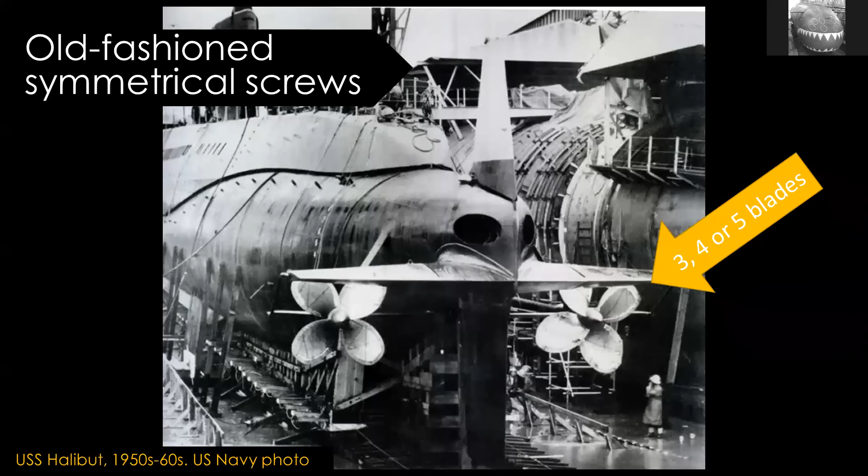What's not under there is a traditional propeller like you might draw it. This is called a symmetrical screw. The blades are essentially the same front and back, and it was absolutely standard on ships and submarines up until about the Cold War. This is an early Cold War US Navy one, and it's got two 4-blade screws. They're 3, 4, 5 blades, all pretty normal.

However, during the Cold War, it's realized that the propellers were one of the main sources of noise, and therefore the main way to detect and identify submarines. So a lot of effort was put into making the propellers quieter, especially in the West.

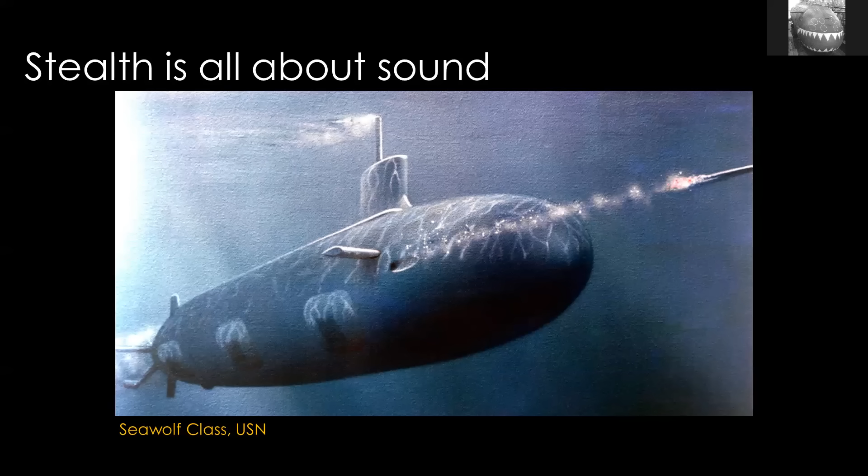This first of all resulted in much larger propellers, and the main reason for that was to allow them to turn more slowly. One of the causes of the noise was that when a propeller turns very fast, you get cavitation. You get small bubbles forming, and those bubbles collapse, and they create very distinct noise, which can be heard a long, long way away. So they made propellers very large.

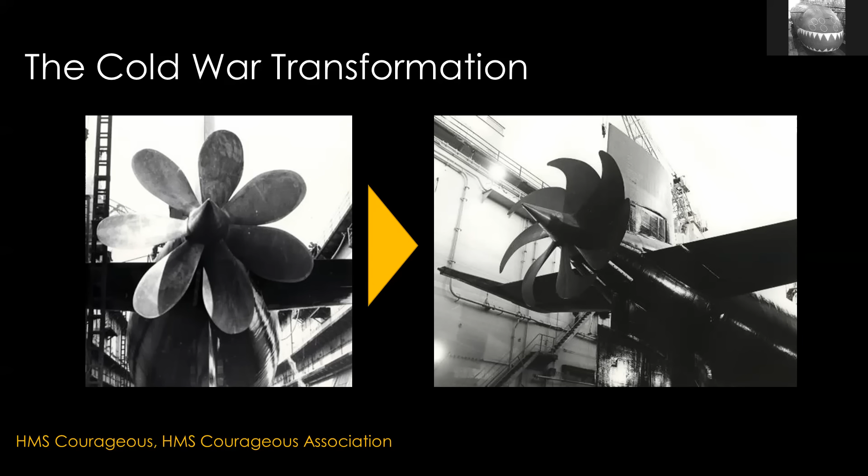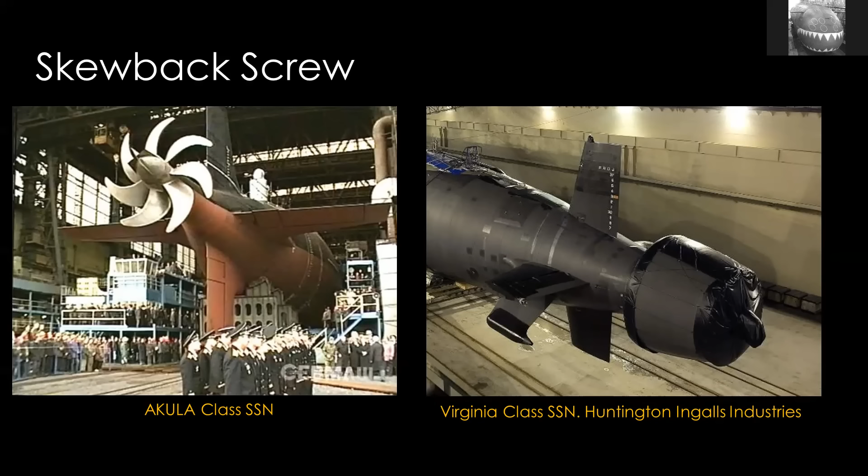So today we have two types that are predominant. The first one on the left is what we call a skewback propeller. That's a Russian Akula-class nuclear-powered submarine. On the right, we have a pump jet, also known as propulsor or even pump jet propulsor. And that is a US Navy submarine, Virginia-class.

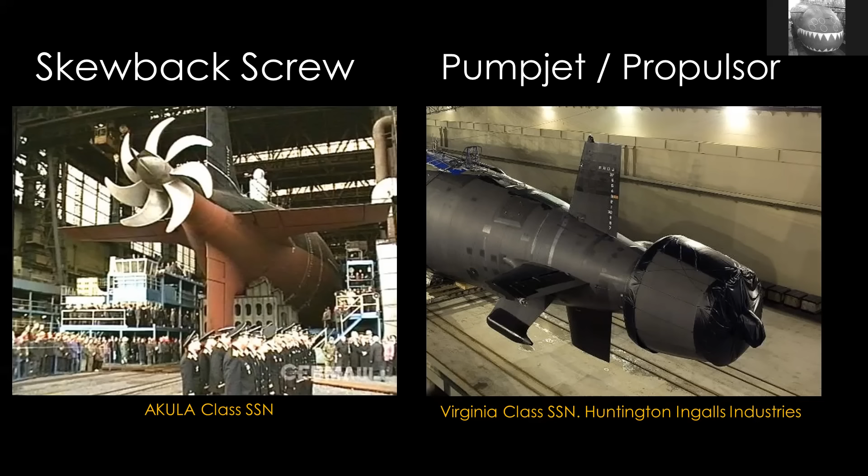Pump jets are stealthier, but they're also less efficient. So they're generally found on large, powerful submarines, nuclear-powered submarines, such as the Virginia-class here. Also, people still cover submarine propellers of both types, but you can see that even though they're not hiding that the Virginia-class has a pump jet, they don't want you to see inside. It's still very super sensitive. So, yeah, we'll look inside later anyway.

But first, let's talk about skewback screws. They turn very slowly to reduce cavitation. They also have a very large diameter, which is part of turning slowly. They mostly have 5 or 7 blades, and they are prime numbers, so they won't have harmonics. They have to be very precisely engineered. Any imperfections could create noise. And there's a lot of care taken to how they connect the propellers to the machinery that's driving it. That's invisible to the observer, but also important.

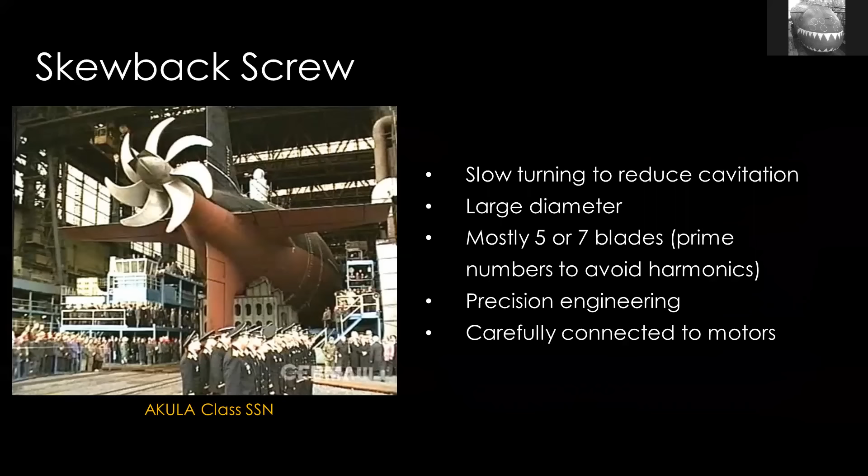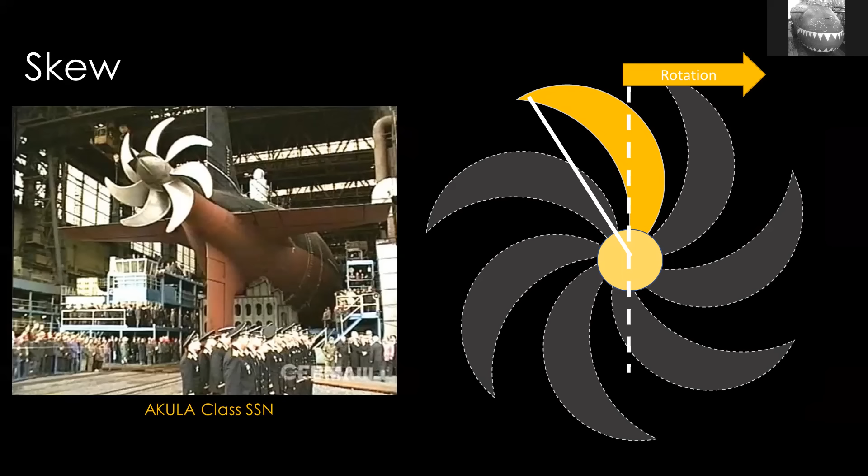So the blades rotate away from the tips, so the tips are trailing, if you like. And the angle by which they're trailing is known as the skew. They're also sloping backwards slightly, which is the back part of it, so skewback. How much varies greatly from submarines, but generally speaking, the sickle-bladed sort of screws that you see, they're called skewback.

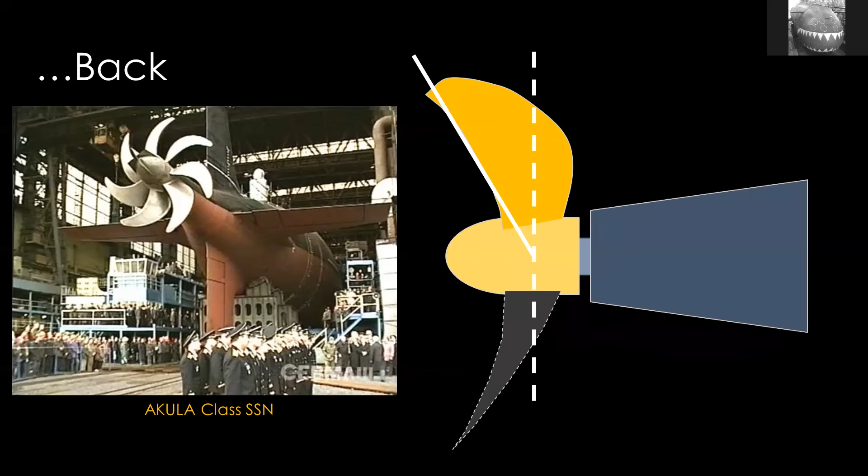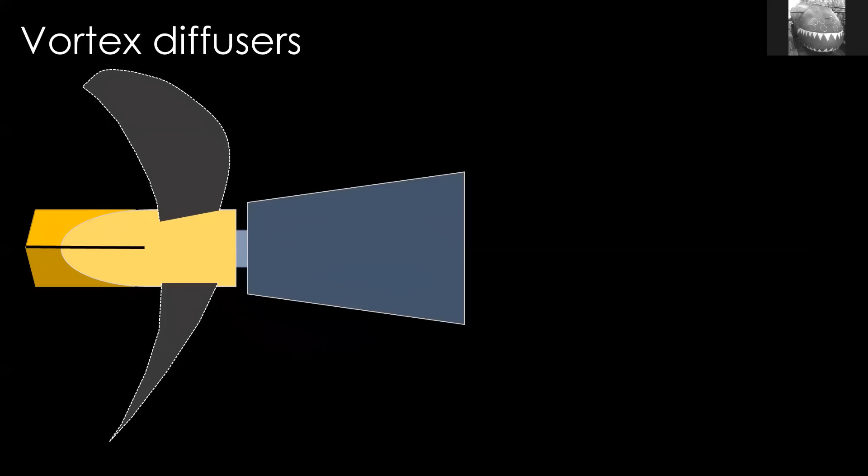The feature you'll see, which you might have noticed on the picture of the Akula, is that the back of the propeller boss has an additional structure on it. This is a vortex diffuser. On the Russian submarine we just saw, it's basically a simple cruciform shape - 4 blades fixed to the back that rotate with the hub of the screw, diffusing the vortexes created at the base of the propeller. Again, another source of noise and inefficiency, drag.

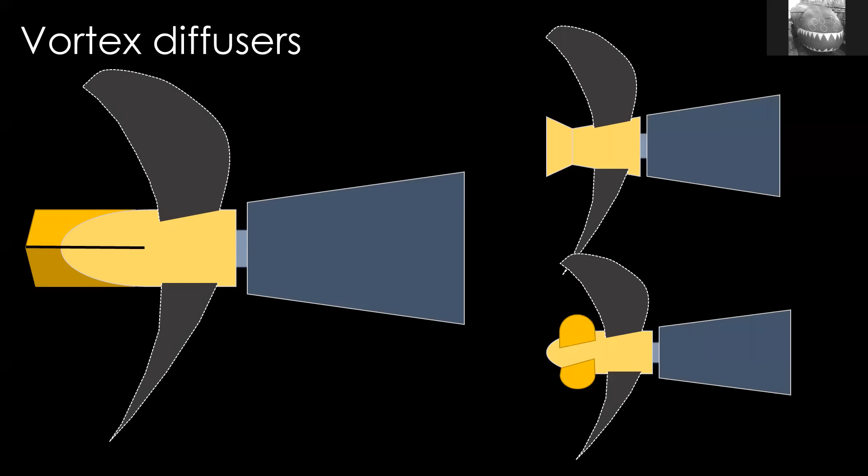You also have different shapes of them. On the right, you've got a flared shape of the boss, which certain submarines have or have had. You also have ones that look like propellers - some literally look like very small propellers, but they're generally more large and simplistic shaped. A more elaborate one you might see is on the Type 212 submarine, and lots of German submarines in fact, and this is doing the same thing.

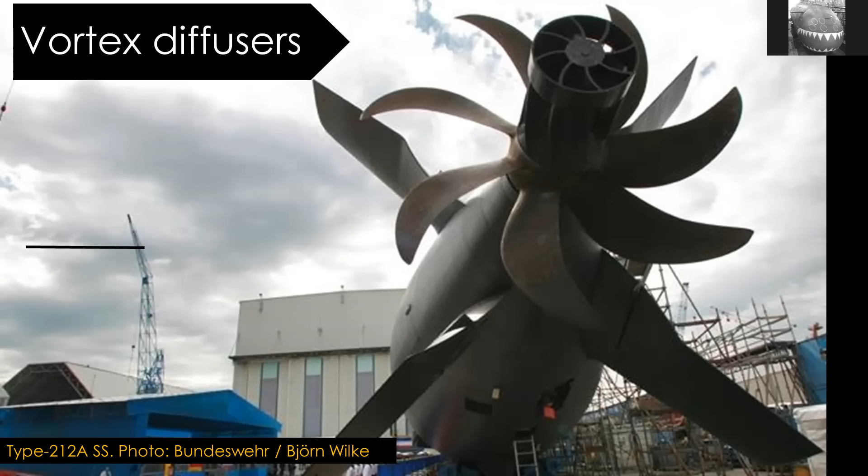Let's talk about pump jets. As I said, people still don't want you to see inside them, so let's look inside one.

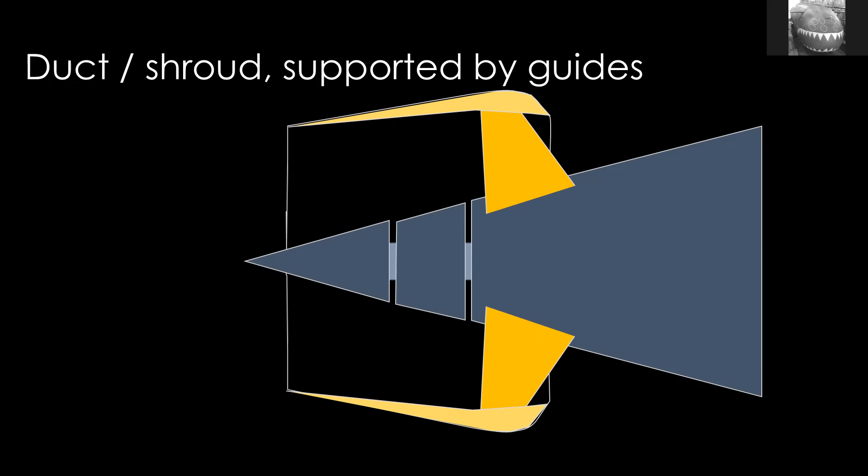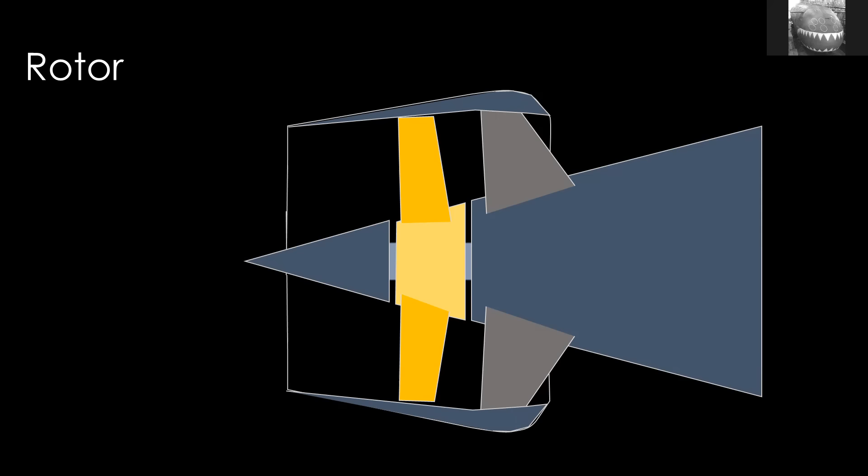Viewed from the side, you've got this shroud or duct, and as we cut it away, there's essentially an aerofoil on the outside formed by the duct going all the way around, supported by guides. These guides vary in number, but they look like a fan from the front, and that's what you normally see at the front of the screw, the pump jet. The rotor or propeller is in the middle, typically with a ring connecting the blades on the outside - sometimes you get 2 - and it's like a jet engine essentially. Then at the back you have stators, which straighten and smooth out the flow of the water coming out the back.

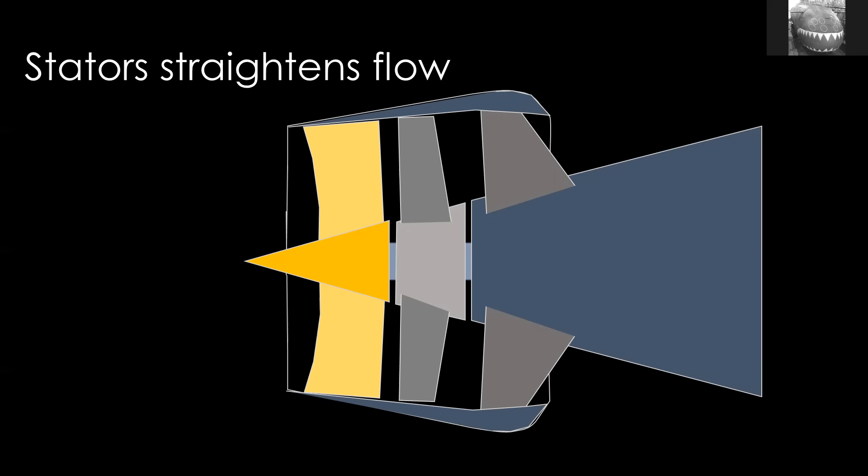All of these parts are super sensitive, and different designs have slight variations. Generally, there's a minimal gap between the blades and the duct fairing, which is really important for reducing noise and efficiency. Some designs might have the stator in front of the blades. They'll have a lot more blades than a regular propeller, which makes them quieter essentially - 11, 17, those sorts of numbers. Like screws, the blades are typically in prime numbers to avoid harmonics. Also, if there's more than one rotor, one in front of the other, they'll have different numbers of blades.

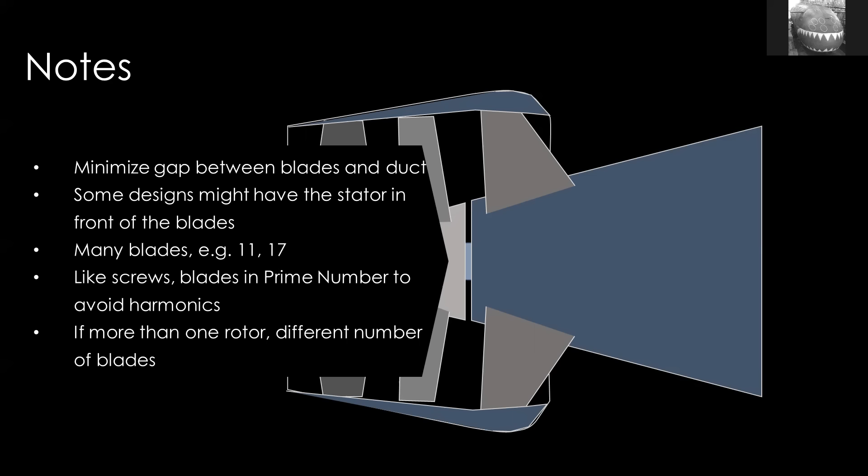So who has them? In the submarine world, they were pioneered in the 1970s by the British. HMS Churchill was modified to have a pump jet, and subsequently the Swiftsure class, Trafalgar class, Vanguard class, and Astute classes all had them. The US Navy followed in the 1990s with the Seawolf, and now the Virginia class. The French also followed in the 1990s with the Triomphant, now Suffren, also known as Barracuda.

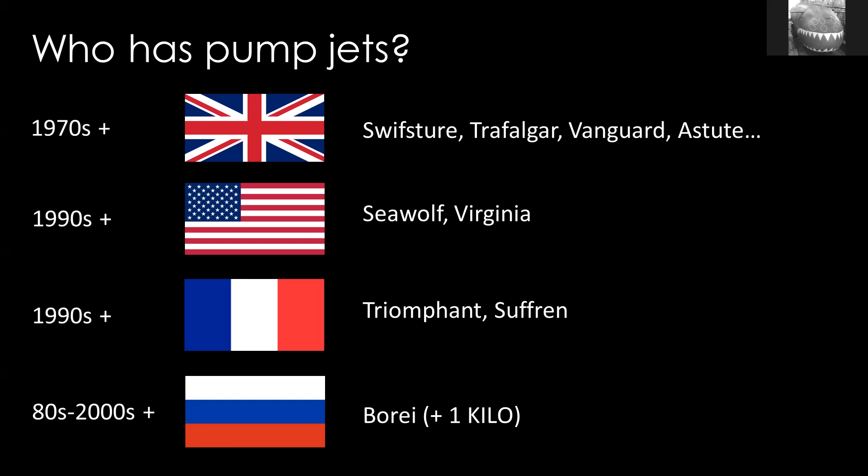Russia is interesting because, as I mentioned, Alrosa, this Kilo class submarine, was fitted with one first. Definitely in the 90s it had one, and I think it was actually built with it in the 80s. However, there was a big delay, and it wasn't until the Borei class was being built in the 2000s that we actually see lots of submarines with them - and they're only fitted to the Borei class and a few related submarines. They're not generally seen on most Russian submarines.

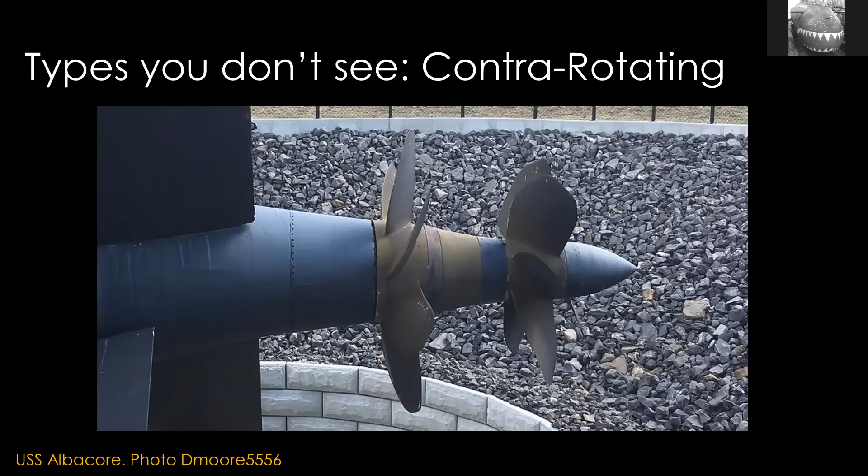Let's talk about some variations out there. Something really cool that they tried out but didn't really take off is the contra-rotating screw or propeller. Essentially, this is two propellers in tandem which rotate in opposite directions. Really good for speed and things like that, but not really adopted, very complicated machinery.

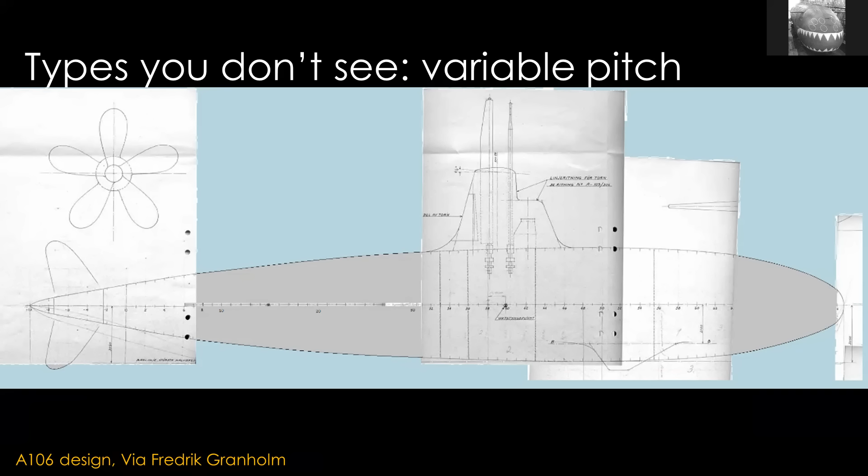Another one which was used quite a lot, but is now not very common, is the shrouded screw, also known as a Kort nozzle, after one of the inventors. A lot of Russian submarines had this in the Cold War. Essentially, it looks a bit like a pump jet, but it's not - it's a regular screw with a shroud going all the way around the outside. That shroud has a very specific shape, different shapes obviously for different designs, and the shape will have different impacts on the performance. It's generally going to be quieter, especially from the side, but overall not much compared to a skewback screw.

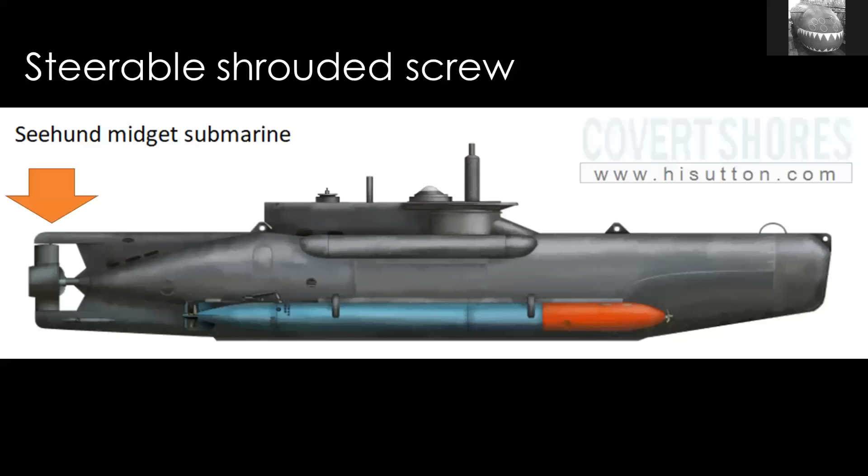A variation of that is to have the shroud mounted in the rudder and actually move with the rudder - so really thrust vectoring. This is a World War II design. There are some special submarines I can think of with this, but it's not for stealth. It's very cool, very unusual, improves no doubt the turning radius, but not good for stealth.

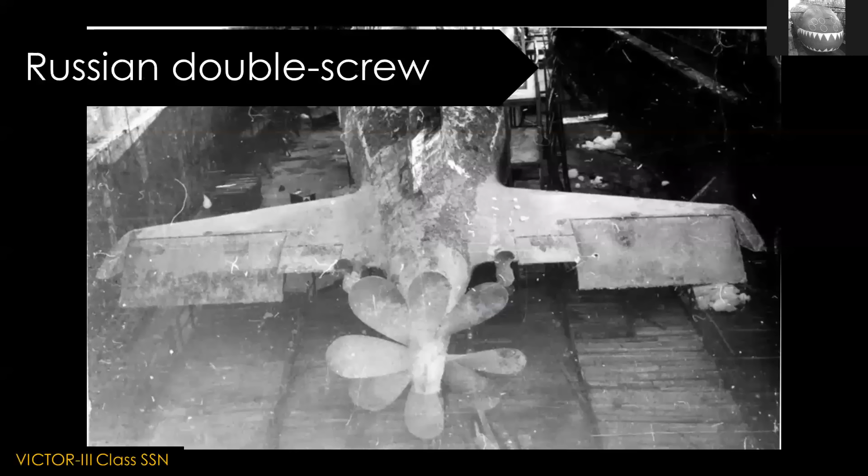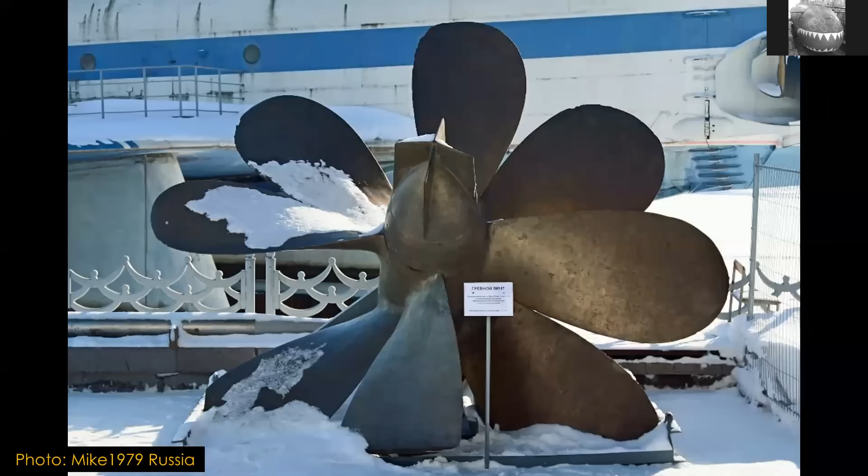Another design which was around in the 80s, but we don't see anymore, is the double screw. I don't know the official name for this, but that's roughly what it is. It's not contra-rotating - all the blades are going in the same direction, but there are two sets of blades, one in front of the other, slightly staggered. Here's a better image of it, off the submarine in a museum. Really interesting design, I think it looks super cool, but it wasn't great for stealth.

The main disadvantage here was that it became quite fragile. The more blades you have, the thinner they have to be, and the weaker it is. It's an interesting idea, and we could see it again. Additionally, 9 is not a prime number, but maybe 11, whatever. So really interesting and probably a unique blade there.

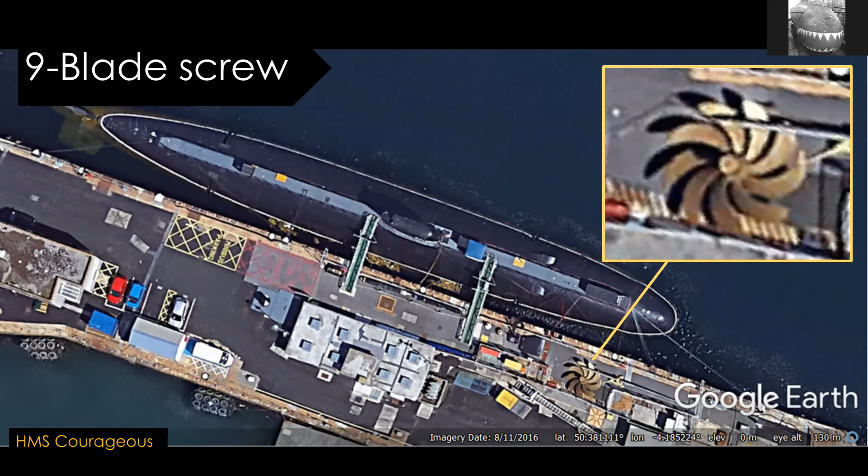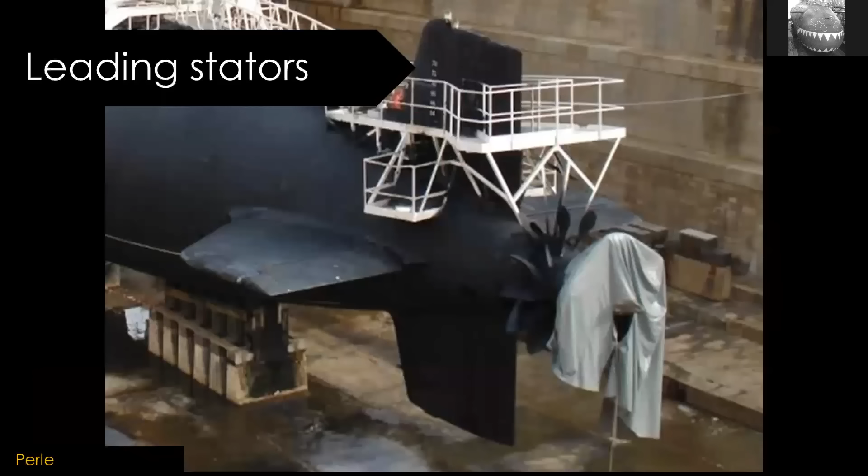Another one which you hardly see is mounted on the Rubis class in France. You can see that whoever's working on the submarine thought it was prudent to put a shroud over the actual screw itself. However, in front of the screw, you have these fixed stators. These don't rotate. They look like they do, but they don't. And again, it's to smooth or to modify the flow of water going into the propeller, both for efficiency and probably acoustic reasons.

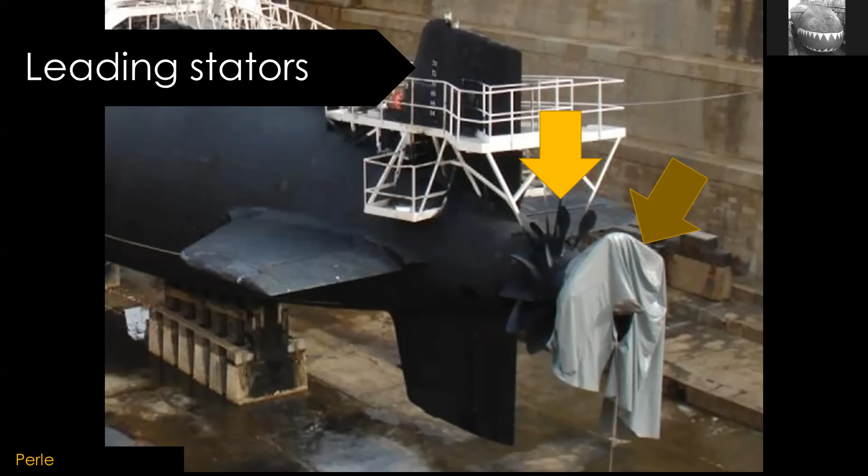Other submarines with this, the Dakar class that Israel is having built, really interesting submarines. The official graphics also show this. No great surprise. It seems to be increasingly normal on German designed submarines.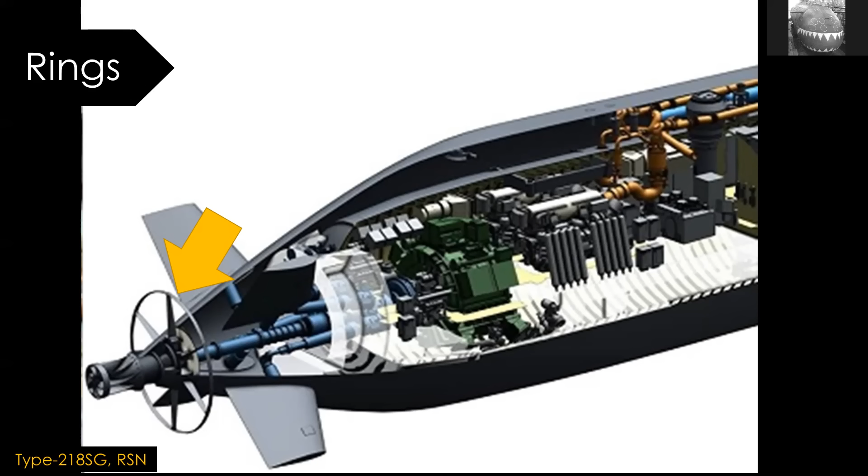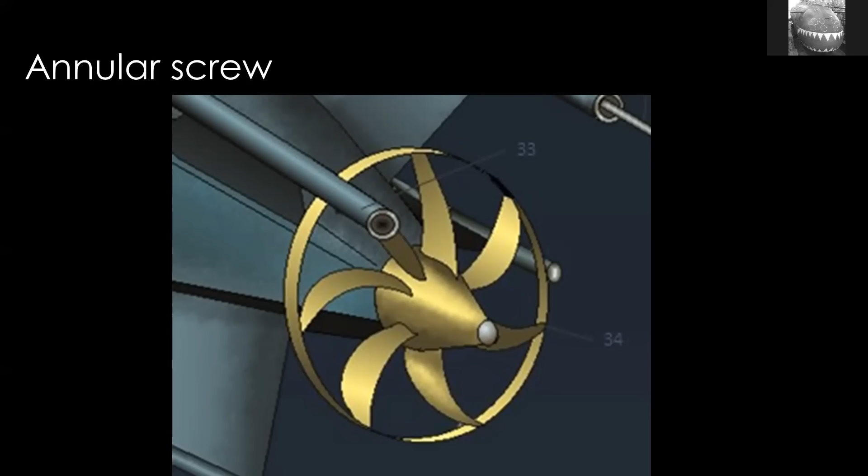One that I couldn't find a photograph that I wanted to use is an annular screw. There are certain classes of submarine that have this, and it is essentially a skewback propeller, but with a ring connected all the way around and joined to the tips of the blades. And the blades are typically going to be less skewed than some other designs. The types that use this are incredibly camera shy. This is my drawing. It's not a great drawing, but I had it. Sometimes this might be paired with a ring similar to the Type 218 that I just showed on the previous slide.

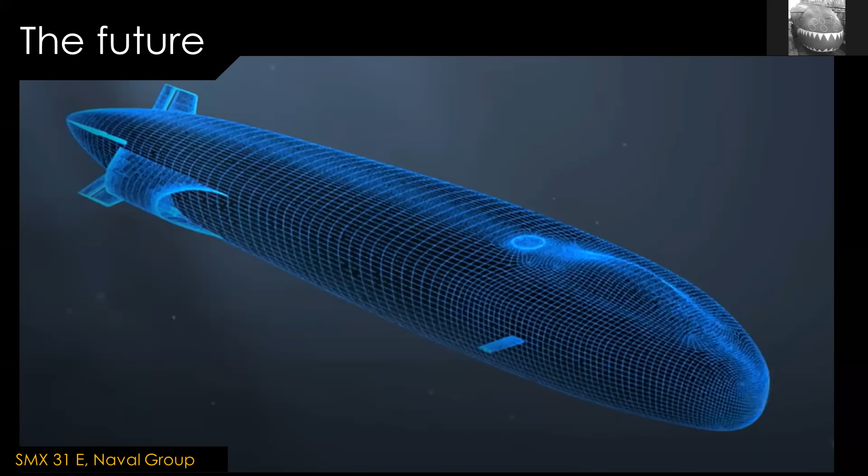What is the future? I think in general, submarines are going to continue to have the types of blades and pump jets that I mentioned. However, one interesting technology out there to watch for is rim-driven pump jets. What this means is that instead of rotating the rotor from the center with a drive shaft like a regular propeller, they actually drive it from the outside of the ring of the blades. And sometimes it has a central hub to it all the same, but sometimes it might actually be just a hole in the center. And if you think about it, that hole is not actually rotating at all.

So really interesting design. The reason it's so attractive more than anything, I think, is that they no longer have to be attached to the center line of the submarine or the center line of the motors that are driving them. They can be offset and basically sat on the outside of the hull, like you see here on this French SMX-31 concept design. And this allows for more flexibility and allows you to have torpedo tubes and things like that at the back again, which had gone out of favor, but is quite a cool idea with modern UUV technology and so on. So I think you might see this.

The one thing counting against this, of course, is cost and investment. Someone's got to invest in actually making it real. But from a design perspective, it's really interesting. It opens up some possibilities, seems to be a good idea.

Another thing to mention, I wouldn't be surprised if some people are reconsidering things like even more blades, because modern technology might make that more possible. Composite blades, individual blades that can be replaced, so that when you damage a blade, you don't have to replace the whole screw. We've seen that to some extent, but it's always still a problem. And additionally, composite blades, we do see that on some very small submersibles, but taking that up to a very large submarine is an interesting idea. So there's modern technologies out there. What I don't think we'll see, of course, is worm drives, like Hunt for Red October or whatever.